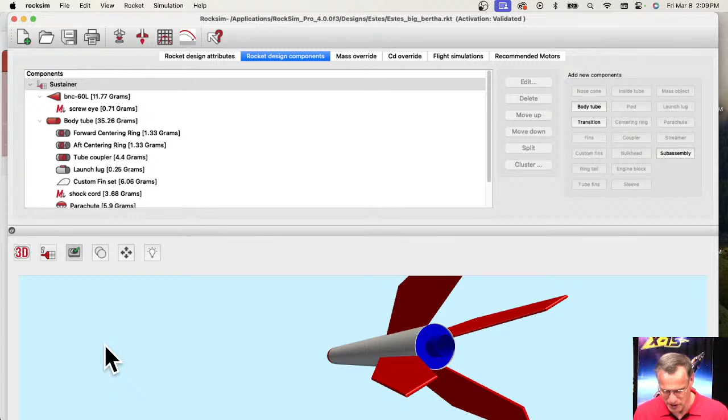So here's what the Big Bertha looks like in RockSim. And obviously the colors need to be changed on this, because having a blue base is kind of weird.

So to run a simple simulation—this might be a question a lot of people have—how do you pick a rocket motor for your rocket? I had somebody come into our store this week with a rocket, and they said, what motors can I use for this? I said, well, first you find the design, like the Big Bertha, and then it's really simple.

Then you just go to Prepare for Launch, which is this button right up here that looks like the base of the rocket with 2 arrows pointing downwards to the blast deflector. So that's Prepare for Launch, and you click on that. Then you just click on Recommend the Motors.

It's going to ask you how long is your launch rod, and what motor manufacturers you want to look at. So I could say, let's just look at the Estes ones. Then use the recommended conditions, click on that, and it's going to run.

And it found 6 motors, all Estes, and it tells me... so this column right here is called RockSim Recommended. 2 of the motors it does not recommend, and 4 of the motors it does recommend. And then here are the motors.

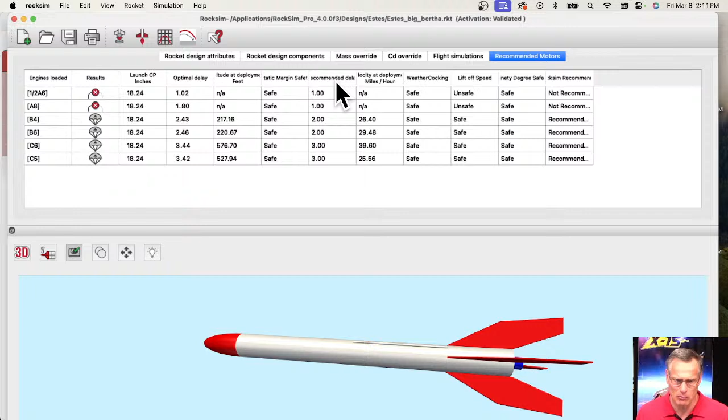And then I'd like to have altitude. Where's my altitude? If you can't find it, you can just click on the column bar up here and do organize columns. So I did a right click with my mouse, organize columns, and you can say altitude at deployment, I want maximum altitude, so make sure maximum altitude is checked, and it added that column over here. I can turn off some of these things I don't need.

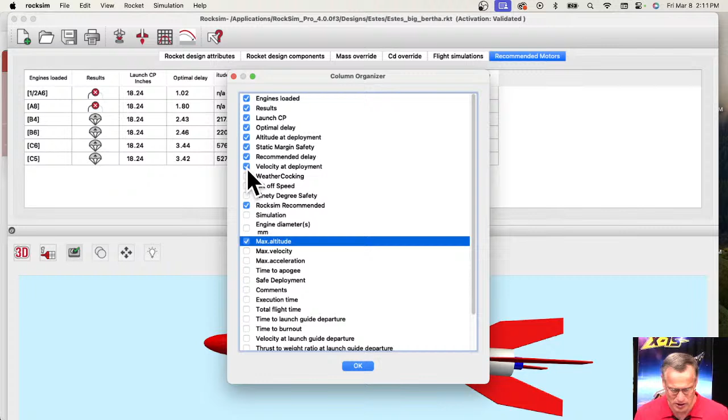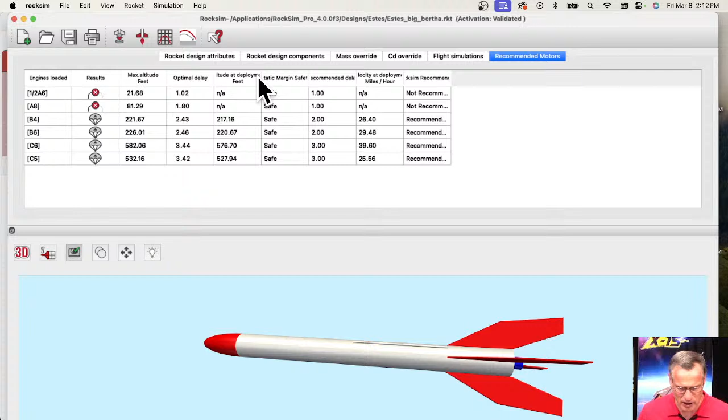Okay, those are good columns. So the results, maximum altitude, I'm going to slide over to here. Oops, one more over—this is the CP at launch, I don't really need that, so I'm going to take that one out. Launch CP, turn that off. Optimal delay, it's always good to know. Altitude at deployment, the recommended delay.

Okay, so it recommends this motor right here, C6-3, so that would be your recommended delay. We get a velocity at deployment, and it tells me that RockSim recommended that motor. So it's how easy it is to find a list of recommended motors—just click on that recommend button, and it will find you all the motors that would work in this rocket. Pretty simple, I like it.

So that's if you're launching your first simulation. All these simulations ran, and if I want to get more detail, I can rerun the simulation. I'll select it, right click, and do load engines, because it hasn't really loaded the engines yet. So it loaded the engine, and if I spin this around, I should see the engine in the back.

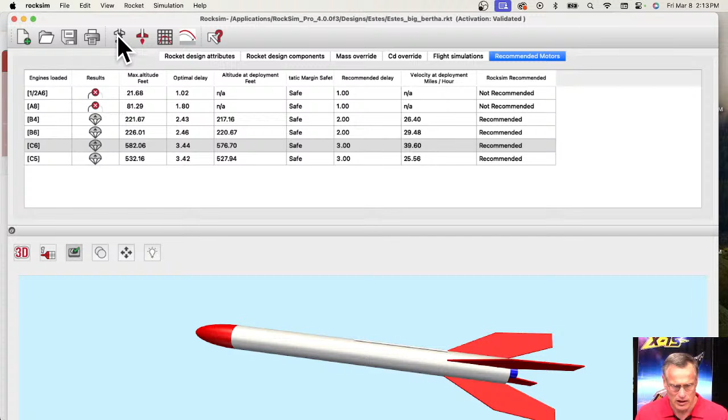Alright, so then I'm going to go back to prepare for launch. This is normally where you load the engine. We have the C6-3 under flight events. We're going to deploy at max ejection delay. Some of my columns are a little short here. We have the device and the parachute under simulation controls.

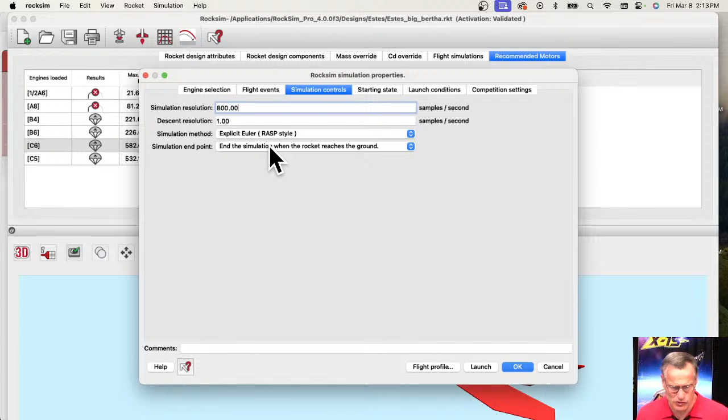That looks good. Starting state, we're actually launching straight up at a 0-degree launch angle. This is kind of like the direction of the launch angle, and this is a wheel, so it will control the launch angle like this. But I want to launch straight up.

Launch conditions, I'm launching at an altitude of 700 feet, which is kind of like eastern Iowa. Got a temperature of 59 degrees, which is a little warmer than it is outside right now. And I have a custom wind of 8 miles an hour, and this is a constant wind because I have low and high wind speed set to 8 miles an hour. And then I can hit the flight profile, and it's going to rerun the simulation again.

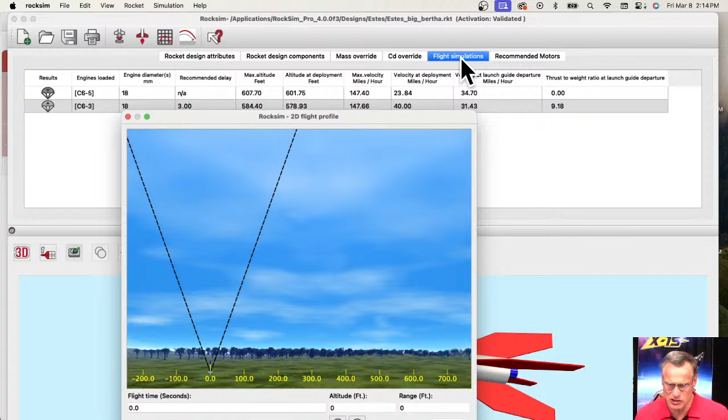And this time, before we were at recommended motors, now we're at the flight simulations tab, and that's what we're seeing in this column here. So here's the C6-3, and it's an 18 millimeter diameter motor. They recommended a 3-second delay, and it's going to hit about 584 feet.

And then this screen right here is kind of a two-dimensional image of the rocket. So here's the rocket sitting down here at the pad. This V shape right here, we call that the weathercocking cone. We want to see the rocket stay inside of this cone until it hits, or at least for the apogee point. So the highest point should be between these two lines.

So we click the launch button. We can see the rocket's taking off, and we're still in the lines, and there's our apogee point. So this would be a good launch. Right now we're at an altitude of 460 feet, and it's still drifting downwards, and it should come back down to the ground about 413 feet downrange. So that's a pretty good launch, I would consider that one acceptable. So that gives you more detailed information on that particular launch.

Okay, let me see if there's any questions.

Okay, so Mark Sell is trying to decide 3 versus 6.

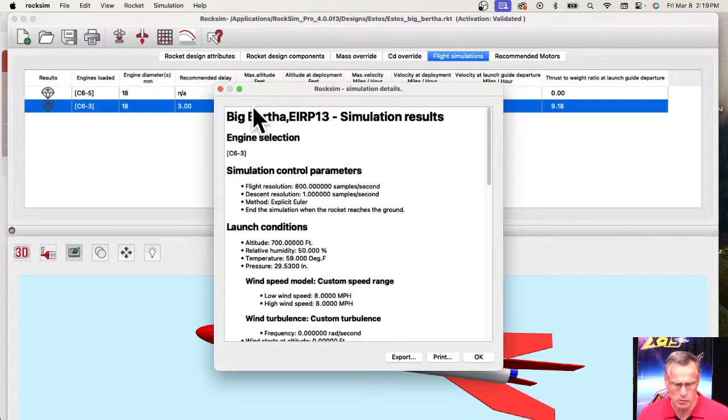The other way, like he said, is you can double click on this row and it's going to bring up a detailed report. This is what the detailed report looks like, for that particular flight. If you scroll down to the bottom, you'll get landing data. So here is the landing data, and here is the range at landing.

Yeah, that's a good idea, having range in these columns. So that's the second way you can find it.

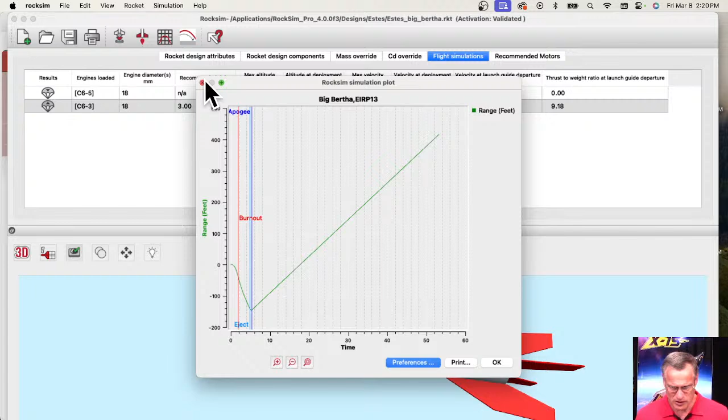And the third way, if you're really interested, is to plot the graph. We can plot along the x-axis time, and on the y-axis range, then clear out these rows and click plot graph, and here is the graph. Let me make this bigger.

Okay, so here's the range. It starts at 0 where my thumb is, then it goes negative, then positive. Why is it going negative? That's because we had wind blowing this way, and the rocket arced into the wind, so it went negative range until apogee, and then it started coming down this way because the wind was blowing it while the parachute was out.

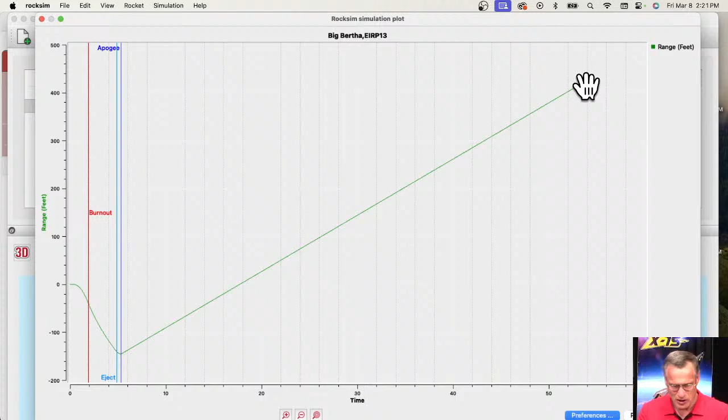So it started going positive around 12, 14, 18 seconds into the flight. It crossed over, took about 18 seconds to drift back over the launch pad, and then it drifted another 30, 40 seconds further, down to 417 feet. So that's the third way to get it.

So the data is there, it's just not in the place that you want it. That's a really good question, I like that one.

Ron Soto, okay, and he says he's from Florence, South Carolina.

He says, for a crumple on the body tube at the top of the fins, should I sand the crumple, sand the body tube, and use 4-ounce fiberglass and epoxy about 3/4 of an inch on each side of the damage? And then he asks, so a 1/5 inch wide piece of fiberglass?

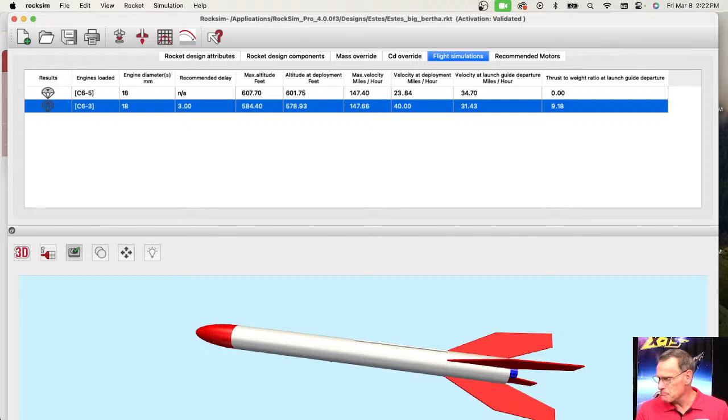Yeah, that's how I do it too. This is not RockSim related, this is just a good rocketry question.

So if you go to the Apogee website, go to How-To and Guides, go down to Advanced Construction Videos, and then come over here to All Videos. So here's all the videos we've done, and there's a video here on repairing a body tube. So I'm going to do a Command F on the Mac, Control F on Windows, and it brings up a search bar that searches only this page.

And what I'm looking for is repair. Okay, so it's used 26 times. How to repair a fin. Okay, kinked tube, so this is the one I was looking for.

So video number 363. If you just scroll down to video 363 from August 8th, this is the technique that I use to repair it, and it's fiberglass. Just basically wrapping fiberglass around the tube, kind of like putting a cast on a broken leg. It's almost exactly like putting a cast on a broken leg, although you can make it nicer looking. So yes, Ron, go for that.

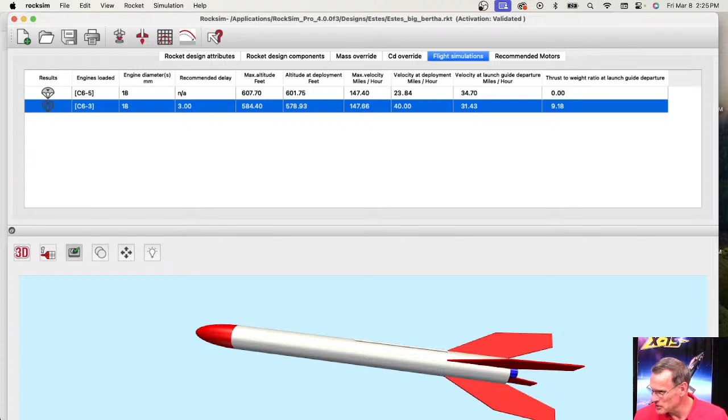Ron Soto says should be 1.5. I think he's talking about his fiberglass. How wide it is, maybe. Yeah, so basically he's got a kink in his tube somewhere like right here. And he's going to put a fiberglass strip around it, just wrap it around completely to strengthen that tube. It'll be stronger than the original tube. Fiberglass is much stronger.

Okay, so let's go back up to Mark Sell's question. So he's got a 3-fin rocket and he wants to change it to a 6-fin. So let's take this rocket here. Right now it's a 4-fin rocket, and so you can see the 4 fins there. And let's turn it to a 3-fin. So how do you do that?

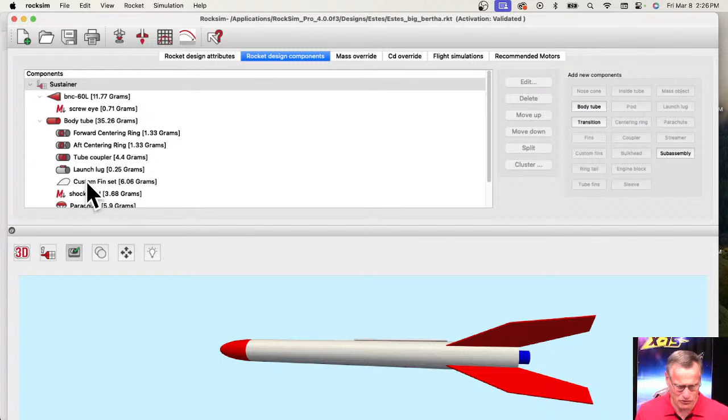Go here to the rocket design components. And then we're going to come down here to the fins. I'm going to edit the fins. So I just double clicked here. And I'm going to make the screen a little smaller so you can see it. There it is.

And right now it's showing 4 fins, and I can change that to 3 fins. And we've got a huge static margin here, 2.75 inches, or a static margin of 2.75, which means that this center of gravity is 2.75 times the diameter of the tube in front of the center of pressure, which is that red dot right there. We only need to be about 1, so the static margin only needs to be about 1.0. That's kind of like the rule of thumb in rocketry.

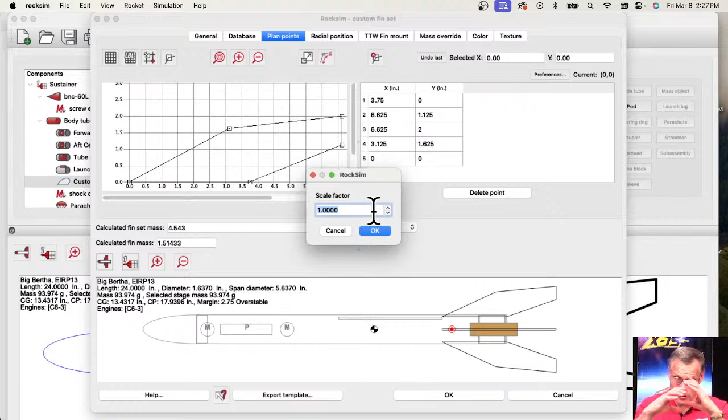And one of the ways that you can change that is by adjusting the size of the fins. So I'm going to go here to plan points, and I'm going to hit the scale button. And I'm going to scale these down, so I'm going to make them smaller than the current fin. So let's try 75%. Click OK. You can see now the fins are smaller, but they also shifted forward.

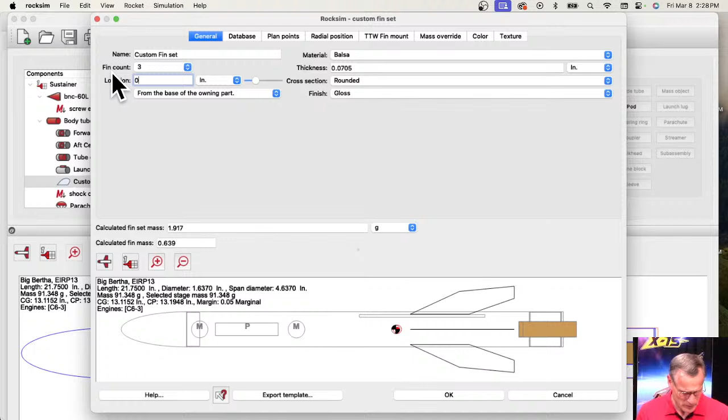So I need to go to the General tab, and I need to change the location to the base of the owning part. And now we're measuring from the bottom of the tube to where the bottom of the fin starts. And right now it's at 4.5, and I'm going to change that to 0. Hit tab, and so now we're over here. We got 3 fins, and we still have this huge margin. But before it was 2.75, now we're down to 2.2.

So theoretically, we can make these fins smaller. I want to make this 3 fins. Just saying, why am I, there we go. So why am I seeing 1 fin straight up and down? Okay, I can make this fin smaller.

Let's do that. I'm going to go to the plan points, and here's the shape of the fin. So I'm going to take this fin point right there, and move it forward. So I'm changing the shape of the rocket a little bit. It's not that critical, you can see I'm making it stubbier. My margin is now 1.6 instead of 2.2. So I'm getting there.

I'm going to move that point right there. Okay, so now we're at marginal 0.8, so I made it a little bit too small. So let's make this fin just a little bit bigger. Getting closer. Okay, so that's like really close, we'll call it good enough. So there's my fin. And we're going to click OK.

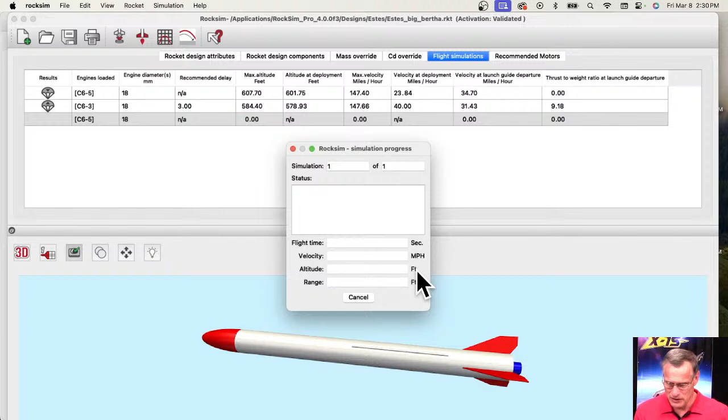Still running. Okay, let me see if I can scale the image. Okay, so that's better, I got more ground right now.

Okay, so here's the rocket sitting on the pad, and let's launch it and see what happens. It's going up, still going okay. It's still inside the cone, so we're fine. There, it looked like it ejected just a little bit early.

And then it's coming down, and this time it's drifting further. Why did it drift further? Well, that's a good question. Let's see if we can figure that out.

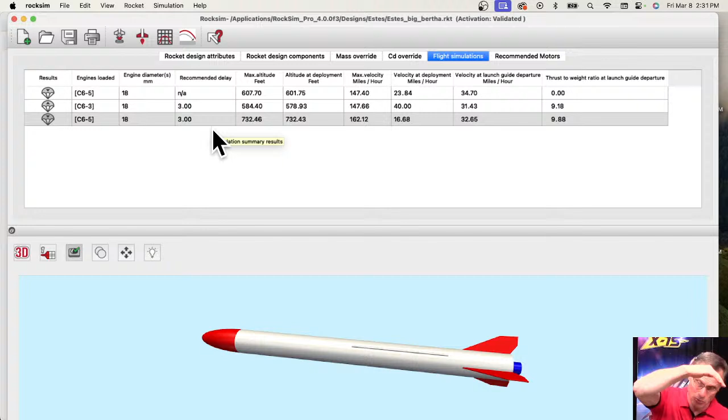So I'm going to cancel there. So this first one had the big fins, and with the big fins it went 584 feet. With the smaller fins, because there's less drag, so there's also 3 fins instead of 6, our maximum altitude is 732 feet, and it tells me that it did eject on the way down. So it did reach the top, and it was starting to come over the top when it popped the parachute, and it was just really close. So I'm going to leave that alone.

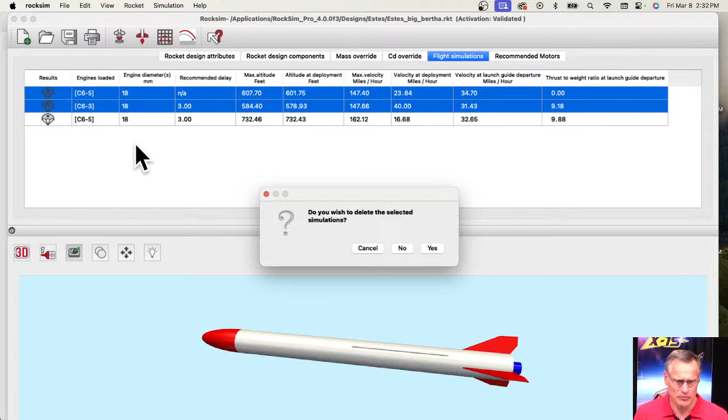So that is our first simulation. I'm going to delete these other 2s just so that we don't get confused. So I'm going to highlight them, do a right click, and hit delete. And it's going to ask me if I want to delete them. I'm going to say yes. Okay, so this is the only simulation with 3 fins and a static margin of about

1.12. And so now it's like, is 3 fins better than 6 fins? So let's see what happens when we change it to 6 fins. So we're going to go back to the rocket design components, go to the fin set, open that up.

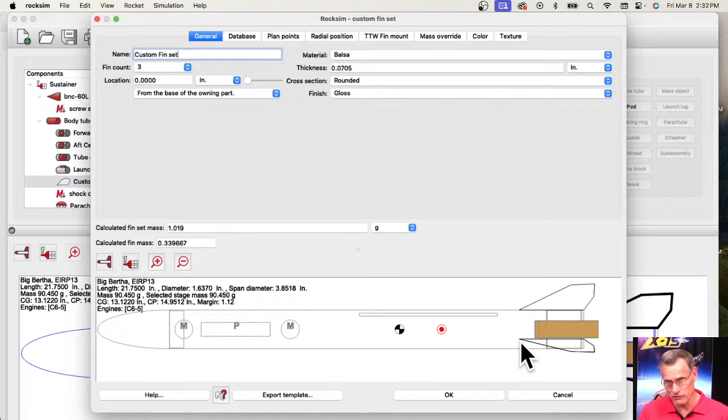So to make this apples to apples, I got to have 6 fins that give me probably the same static margin. So my static margin is 1.12. So if I change it from 3 to 6, my static margin goes back up to 2.21.

Just for grins, let's launch it with 6 fins, 6 fins of the equal size. And let's go to prepare for launch.

And what I want to do is put a comment on this one here. So this is going to be 6 fins that are the same size as the original 3 fins. I just want to have that comment there so I can tell these simulations apart later.

So then I'm going to do a flight profile. Let's take a look at it. It's going to run the simulation.

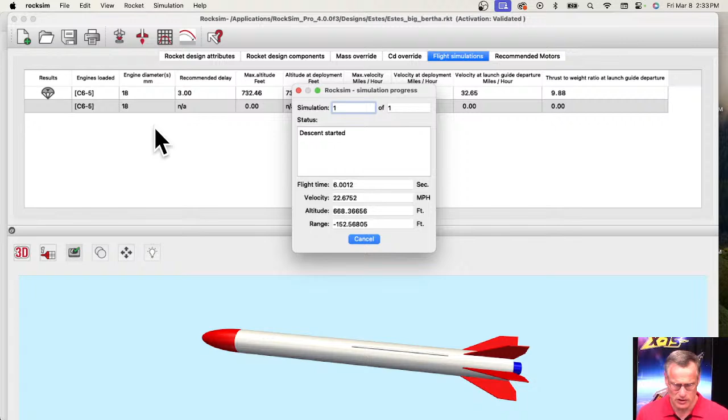And this time, I'm kind of cheating here, I'm looking at the simulation. It's a lower altitude. Why is it a lower altitude? Well, we went from 3 fins to 6 fins, and 2 things changed.

One is the drag is greater because instead of 3 fins, we got 6 fins, so we're going to have more drag. And the other thing that changed is the weight of the rocket, because the size of the fins didn't change, but now we doubled the number. So you got to say if 1 fin weighed 2 grams, then 3 fins is going to weigh 6 grams and 6 fins 12 grams. So 2 things happened, and that's why our altitude went down.

And again, the arrow direction on the parachute tells me the direction the rocket was going when the parachute opened. And since the arrow is pointing down, the rocket was coming down when the parachute opened.

Okay, and then if you want to see that comment, let me run the simulation here real quick. It's going to look fairly close to the last one. Okay, so then it popped out, and then it comes down.

And it's closer to the pad than the 3 fin was, but it didn't go as high, so you don't expect it to drift as far either, right?

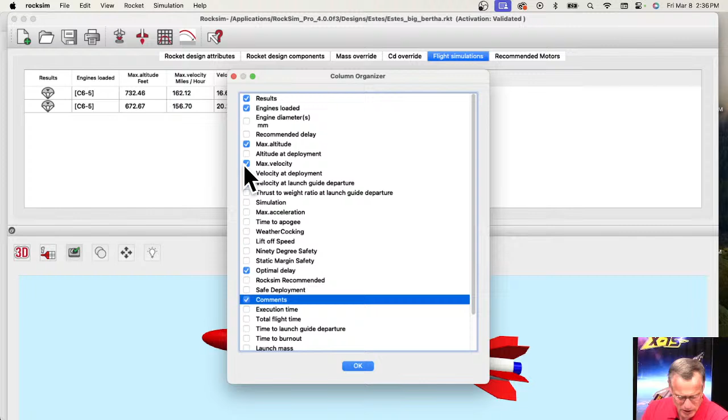Okay, so here's my comments. And if I can expand this column out. So this is the 6 fins that are the same size. This was the original 3 fins. I can't go back, unfortunately, to add a comment later. I wish I could.

Okay, I think, let's see, is there an organized columns? I'm looking for mass at liftoff. If we had here, launch mass. Okay, I'm gonna move that one over here. Let's move the optimal delay over to here and expand our comments out. So at liftoff, the 3 fins did weigh less. It wasn't much.

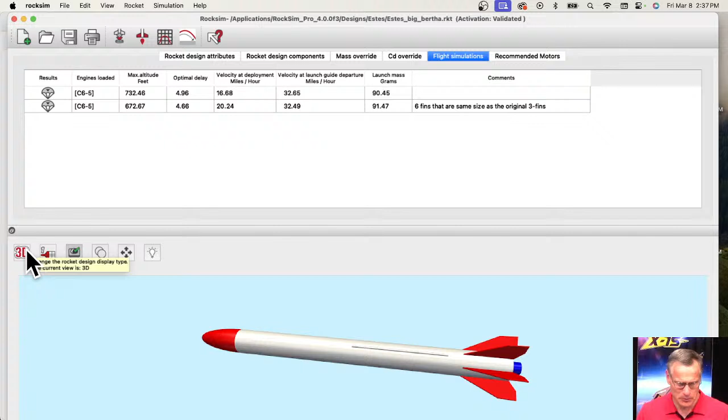Okay, it should be a little bit more than that. I don't know what happened. Okay, so now let's change these fins to be smaller so that the static margin - you can see the static margin in the 2D display right here - and we want to get that to 1.12 or pretty close. So basically we're going to move the center of gravity back towards here, or the center of pressure forward, to get it closer to the center of gravity, so they're closer together.

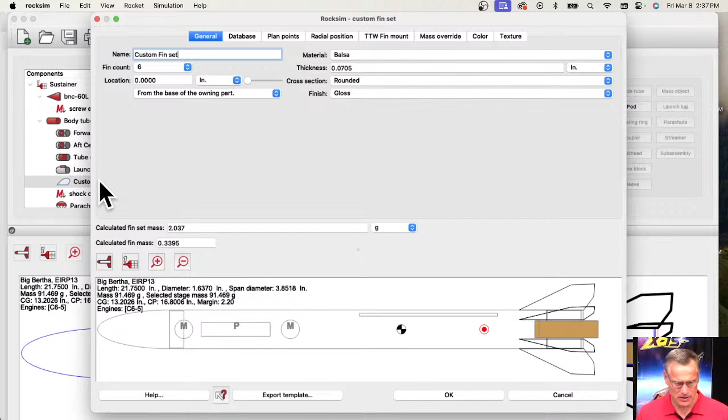And there's a number of ways to do this. Let's make the fin smaller. So go to the rocket design components, go to the custom fins, and we're going to go to the plan points, and we're going to adjust the size again. So here's the size originally, and remember, we're looking at this number right here. We want to get it to about 1.12.

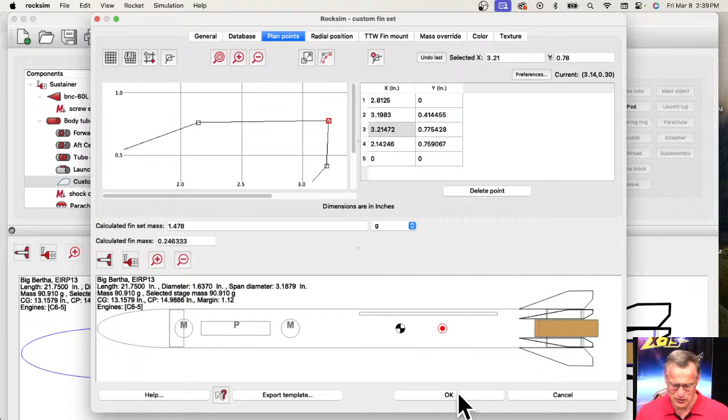I can zoom in and move it. There we go, I got it perfect. Okay, so the fins change size, and click OK. So now the distance between the center of gravity, which is this, and the center of pressure, which is this, is 1.12 times the diameter of the tube, which is what we had for that first simulation that we ran. And why did it move my column?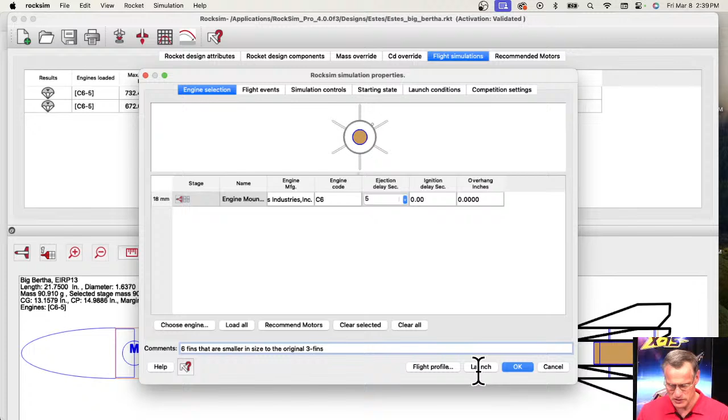Okay, so we're going to run the simulation again. With 6 fins that are smaller in size, compared to the original 3 fins. So let's go to flight profile and launch it. And we can kind of cheat again by looking at the summary screen. So this did not go as high as that.

And our weight is really close. So let's just look at it, see if it's going to go outside of the cone. Remember, this is a cone. And nope, we're inside the cone. We're always looking at the apogee point inside the cone. That's really all that matters. It can do whatever, as long as it's inside the cone, I'm okay with the flight.

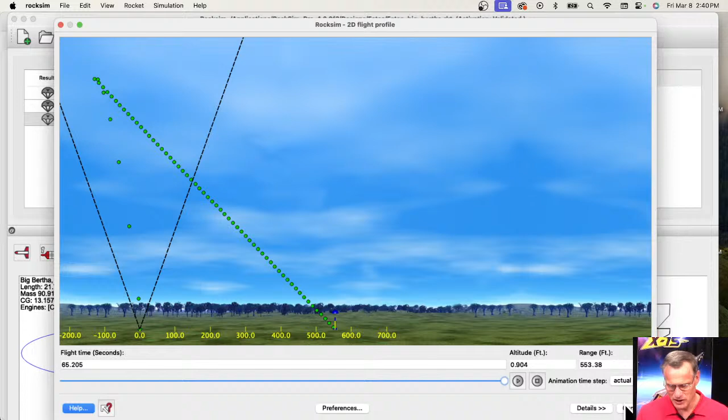Although if it went way off, I'd probably say, no, not quite stable. Okay, so this rocket's going to come down and land about 553 feet downrange, and click cancel. So we're comparing this one versus this one. And so the 3-fin one went higher than the 6-fin one. And both the weights are pretty close.

They're less than 0.5 gram apart, which tells me the difference between the 3-fin and 6-fin is probably just the drag. Just the drag of the fins alone is going to make the rocket fly not quite as high. It's close, but not the same. We're comparing 732 feet versus 696 feet.

So which one is better? Define better. If better means which one went higher, then the 3-fin. If better means which one flew straighter, we didn't really look at the trajectory, but you could probably look at that and see which one looked like it was going straighter. It's typically likely that the 6-fin will go straighter.

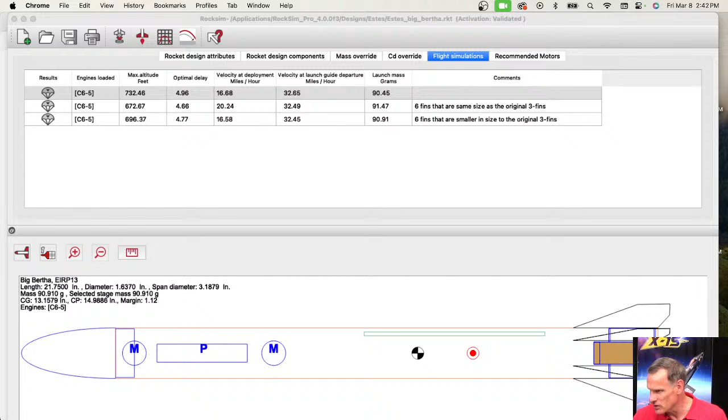Super Neon XL. Okay, so let's go to the internet and see if we can find a Super Neon XL. I'm going to do a search bar and a Super Neon Rocket Kit RockSim file. Let's see if Bing can find him. So we have a Super Neon RockSim design file from rocketreviews.com. Let's go there.

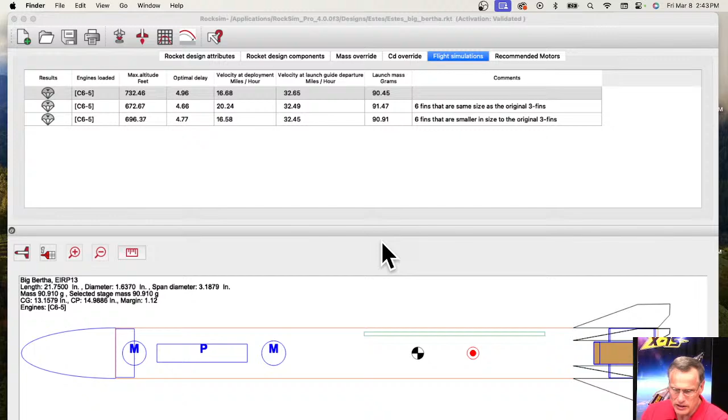Okay, it says download the Estes Super Neon. I'm going to click download and it put it into my downloads folder. So I'm just going to kind of hide that for right now. Go to my downloads folder, open my downloads, and here it is. So here's the Estes Super Neon, and I'm going to open it. And to open it, I just drag it onto RockSim.

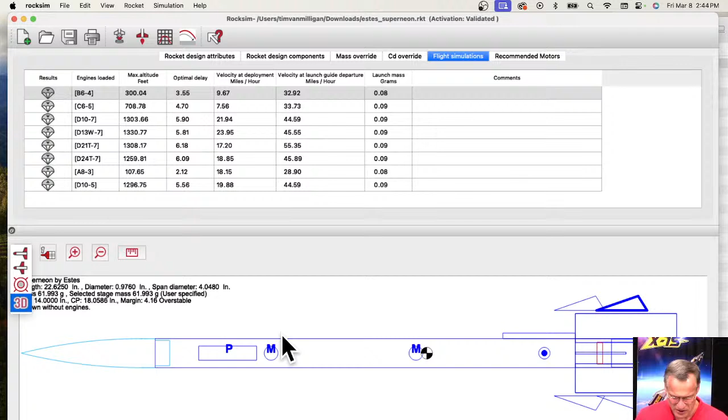And it says, do I want to save the changes to this old design? And I'm going to say no. Okay, so here is a weird design that somebody created. And let's look at it in 3D, see if it looks any better or worse. Okay, so we got some fins, and they're not quite attached to the tubes.

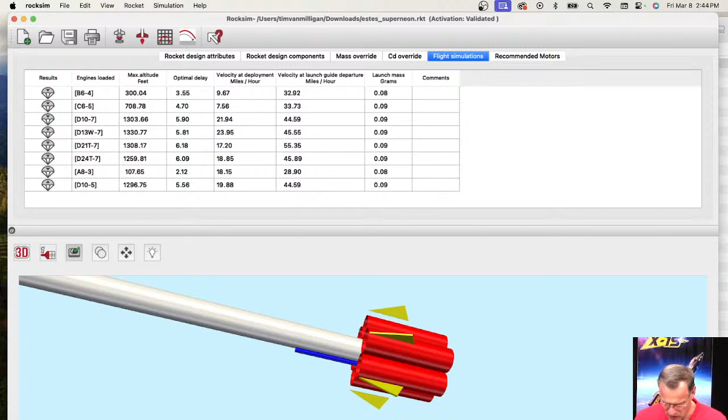Let me see. I do not know particularly what the Super Neon looks like. It said it didn't find anything for that. It's just Super Neon.

Let's do a Super Neon Rocket Kit image. Look at this. What does Bing call this thing? They're... I forget what they call it, but man, it's already finding things about it. What I'm looking for is an image. And let's hit the return key and see what comes back as an image.

So we would have to correct our file first. Go to the rocket design components, click on that. And it's got these fins here. And we have a pod. We have 1, 2, 3, 4, 5, 6 pods attached to the fins.

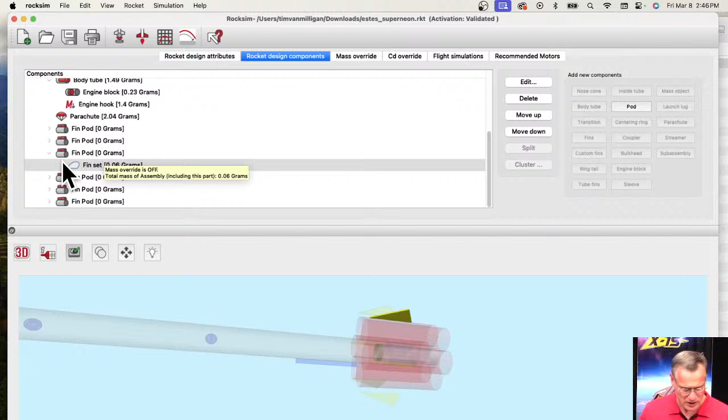Interesting. And each of these pods has a fin, and the fin weighs 0.06 grams. That's kind of like really lightweight. Let's delete these because we're going to have to correct this. So I'm going to select them one at a time and hit delete. Say yes, delete it.

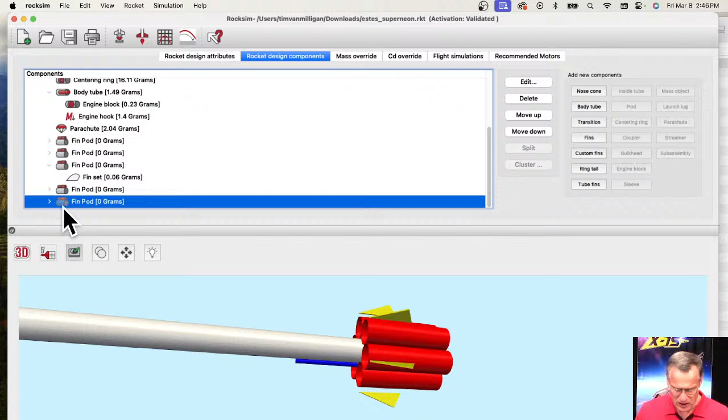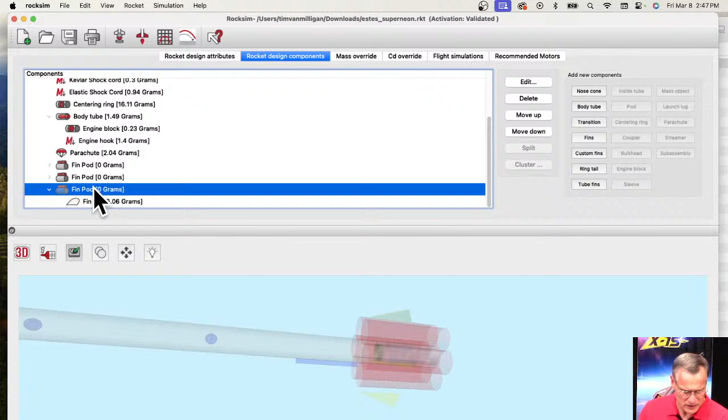And this is going to take forever because my computer's running slow when I'm streaming. Delete. Yes. Delete this one. Yes. Delete that one. Say yes. Okay, so now we're down to one fin right there, if you can see that.

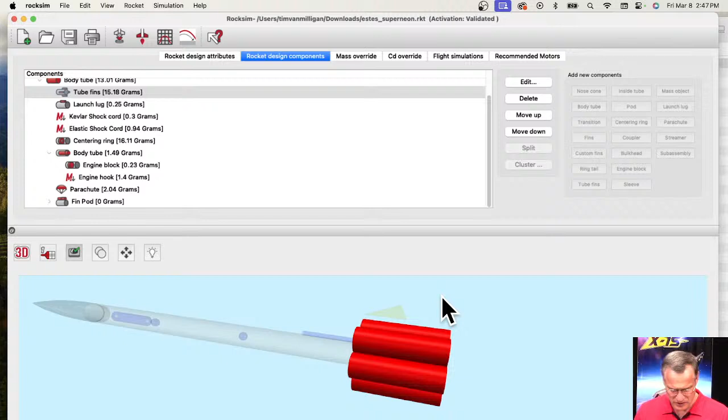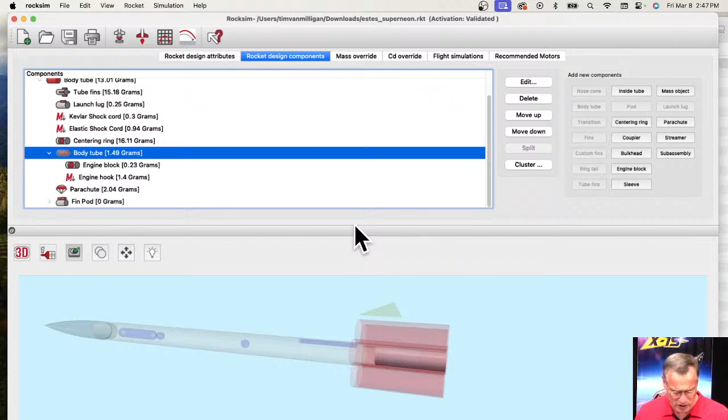So we need to make that look kind of like the other one. So basically, the rocket, just kind of looking at it otherwise, we have a nose cone, a body tube, and then we have these tube fins, which is the right way to do it. We have the launch lug, and then we have all the internal stuff, and then we have this body tube right there, which is the engine mount. I always like to change the name so that I know what I'm looking at. So I'm going to call this the engine mount. Click OK.

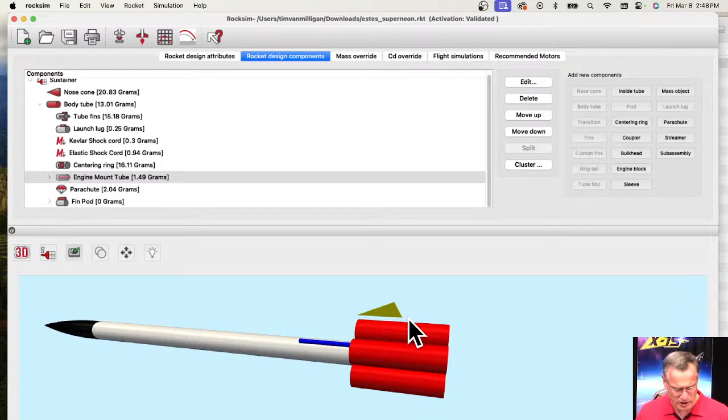Okay, and then we have a parachute and then the pod with the fin. So here's one pod. So a pod, and this goes to the other question that Two Explorers wrote. Was it you? Yes. Yes? No. Yes.

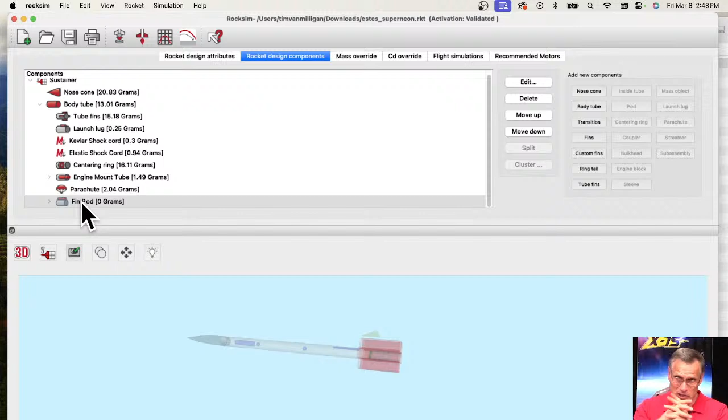Can you save a pod? So a pod is a collection of parts, but a pod that's different from a subassembly is a pod is on the outside of the rocket, subassembly is on the inside. But you can't save a pod by itself. So I'm going to try to open this pod, and I want to edit the pod. So the location of the pod is right there. Let me see where it is, if I look at it at the base view. Okay, so it's on the fin, or it's on the side of the tube. Right there. So that's a good spot for it. I'm okay with that. And what we're going to do is attach a fin to that pod.

So I'm just checking the pod here. It says the pod can be ejected, but no, we don't want to eject it, and we don't want to mark it as ejected. So that's fine. A pod doesn't have any weight because it's just a collection of parts.

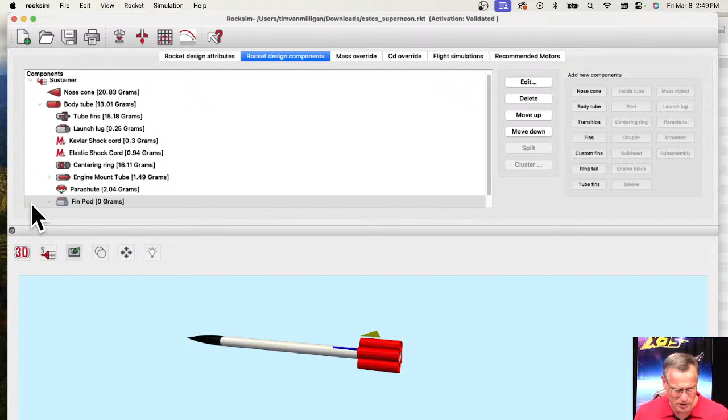We're going to add parts to it, and the part we're adding is a fin. This is a custom fin, and right now it's the shape of a triangle, so we're going to modify that by going to the plan points.

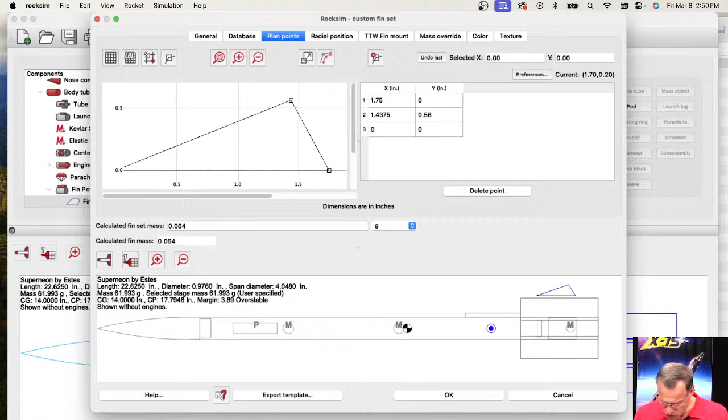Here's my pod, and I've got to look at my picture again. Okay, can I zoom this? Does that zoom in there? Yeah, I zoomed a little. Oops, what did I do? You found all kinds of rockets the same shape.

Okay, so it looks like it's got a short thing, probably about not quite 50% of the length of the tube, and then it extends outward. We're going to approximate it. We're not going to be perfect.

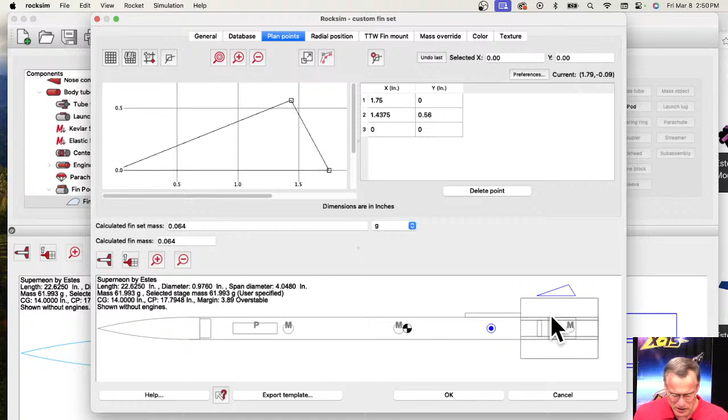So first, this fin location—why is this the front of the fin back here when it should be attached there? Is there anything that tells me fin count? It's made out of balsa wood.

Don't want anything from the database. This is interesting—why is this fin way back here when it should be up here? I don't know.

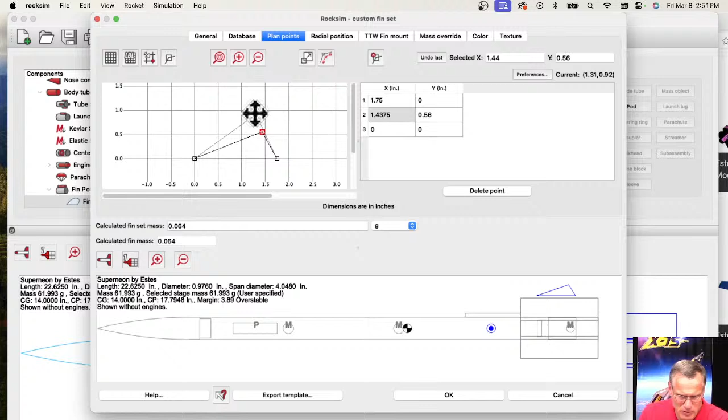Anyway, we're going to make this bigger. To make it bigger, I'm going to zoom out a little bit. Okay, I'm going to grab that point and move it here. I'm going to grab another point, move it there. I'm going to take this point and move it there.

Okay, so now it's a little small, and it moved it even further back. Why did it do that? Why, oh why? But we need to make it bigger.

I think the span is getting close to where we want, but— oops, I grabbed the wrong point. Undo the last. This point right here, I want to make this one kind of like there. I don't think it's quite long enough yet.

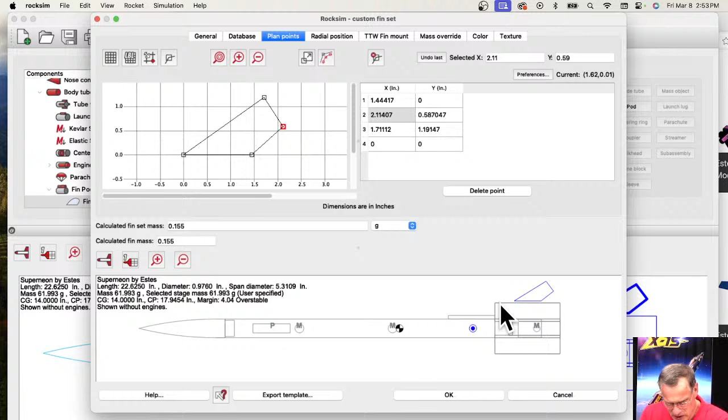I'm just kind of approximating the shape here. Okay, so now my problem is, why is it not in the right spot? That's interesting.

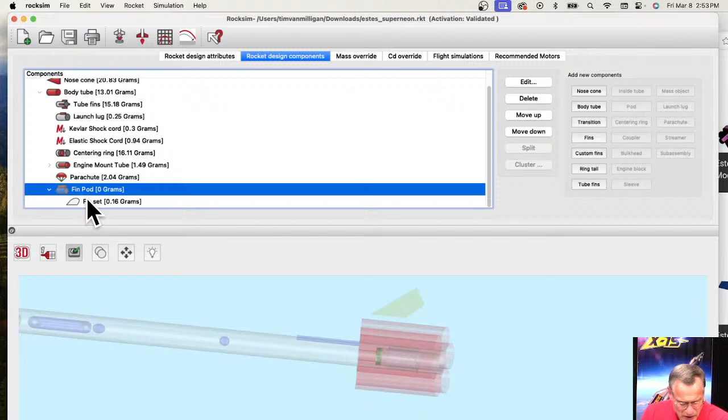Plan points—well, let's see if we can adjust it in the pod location. It's just kind of like too high. Okay, so we're going to take this and slide it forward. So why is it—this should have been right at the center of that.

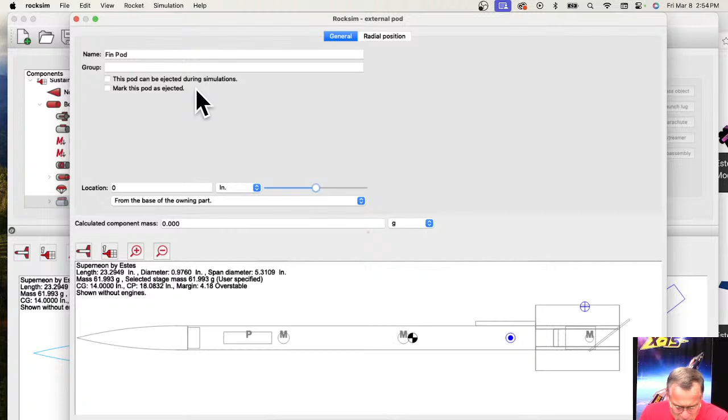Oh, maybe it's this—location 0 from the base. And it's interesting, where's that pod attached? This pod is attached to the body tube. Interesting.

So let's move it forward. Why am I looking at the side of it? This is weird. It kind of flipped things on me. That is weird.

Yeah, it's going to be close enough. Let's look at it from the top view. This is moving around on me. There's something going on—something going on with pods. This shouldn't be happening.

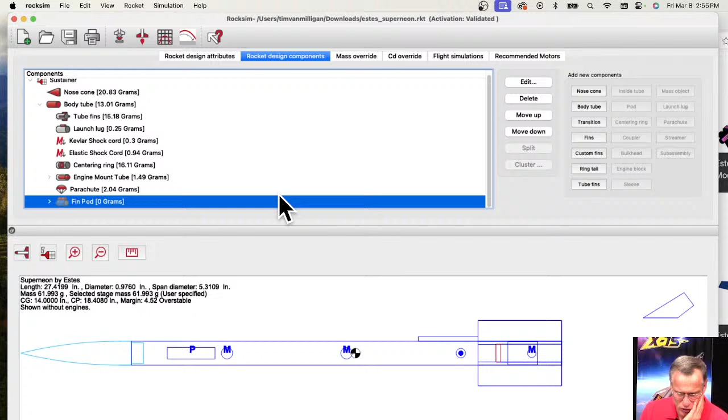It's something I'm going to have to ask the programmer about. Say, what's going on with my pods? I'm currently using RockSim version 11, so this is a version you don't have yet. I thought we were done with the bugs.

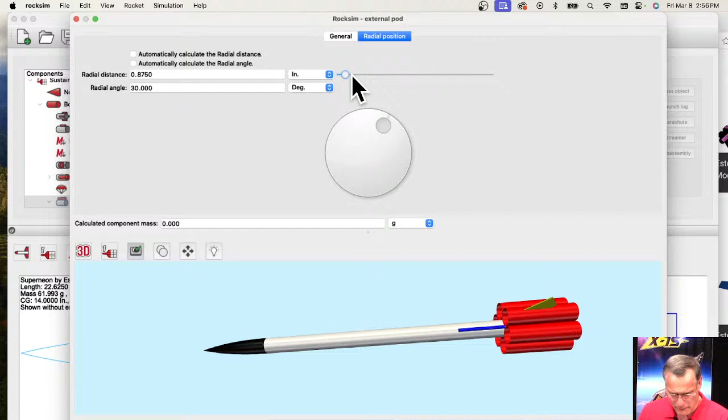But in the 3D, it's just too far up, and I can adjust that here. See, it's a little bit off the tube right now. So that's much better.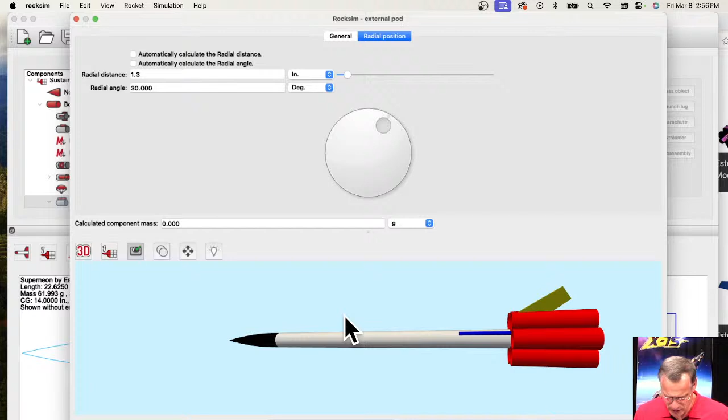Okay, and it's just too far back, but other than that—see, in 2D it just looks different. It looks further back.

Anyway, so now that you have a pod, we're going to duplicate this. I'm going to highlight it, right click on it, and say copy. And then we need to paste it onto that tube. Paste—ooh, look at that, it changed it.

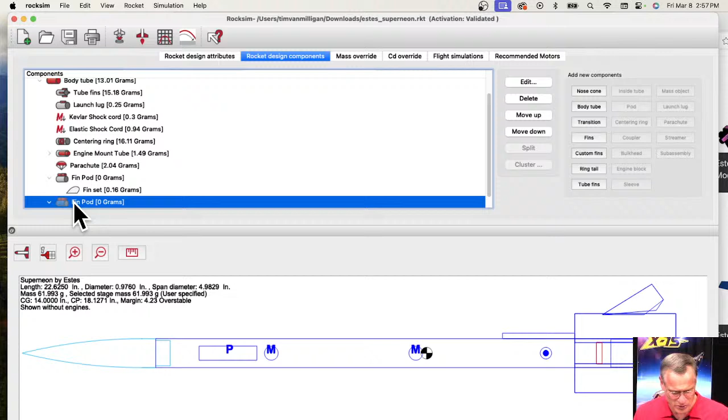What the heck? Okay, so then we're going to go open the pod. Man, it changed my shape. Radial position, let's make it 60 degrees. Let's look at it from the back.

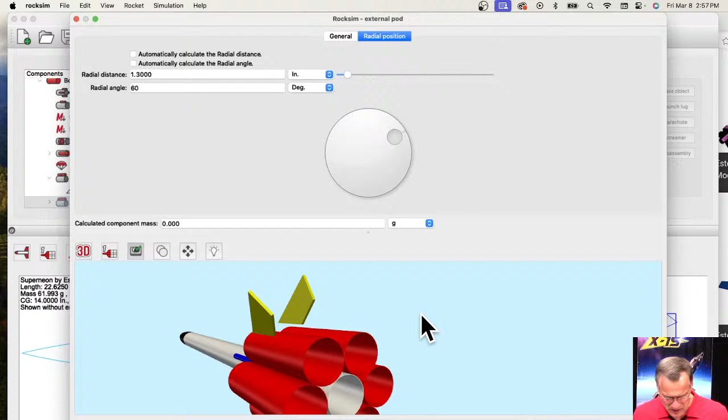Yeah, it's in the right spot. I think I needed to go... 60 degrees should have been it. It's not 120. 90. That's interesting. At 90 degrees, it's right.

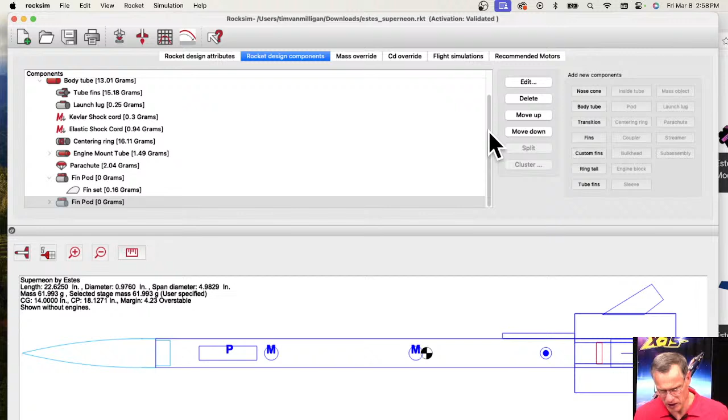And then you got to do it multiple times. But anyway, we're not going to have time for that because we're almost out of time here.

But then you would run a simulation. So again, choose prepare for launch. Choose engine. Let's go with an Estes. Manufacturer code Estes C6 5. Okay.

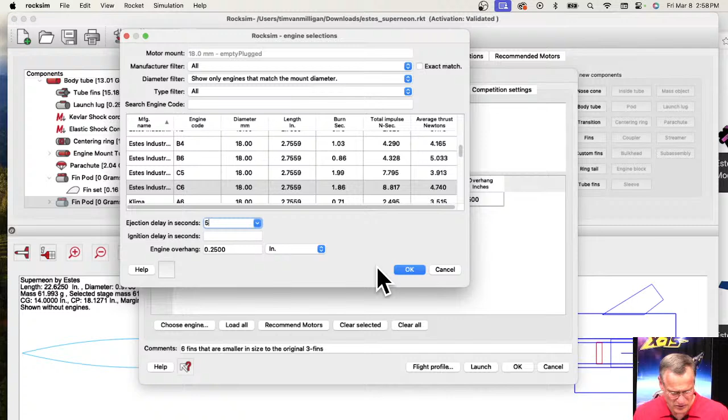Again, before we're ejecting at maximum ejection delay, simulation controls we leave alone. Starting state, it's launching straight up. And again, our conditions are 700 feet above sea level, 59 degrees Fahrenheit with a wind speed of 8 miles an hour. And hit flight profile, let's see if it goes.

And it went. Oops, it left my comment in there. I forgot to clear the comment. All right, and the rocket's taking off, and it's going up, and it's coming back down.

Okay, so it went 705 feet on the C6 5. And basically, I only had 2 external fins, but with the tube fins, the rocket was stable enough.

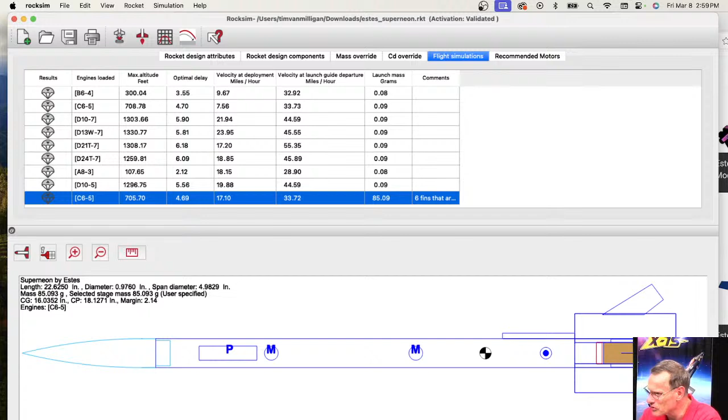So his question to Explorer - I found a RockSim file, but it does not have the balsa fin on the tubular fins. Doesn't seem to want to fly. If it doesn't seem to want to fly, do what I did and modify the design. Don't be afraid to modify it. You can always download it again and start over again. Don't be afraid to try things. Even if it doesn't work, like what you saw me do.

Mark Sell says, you've given me good ideas about how to do the 3 fins versus 6 fins. To Explorer says that file is different from mine, which might be the reason why yours is not working.

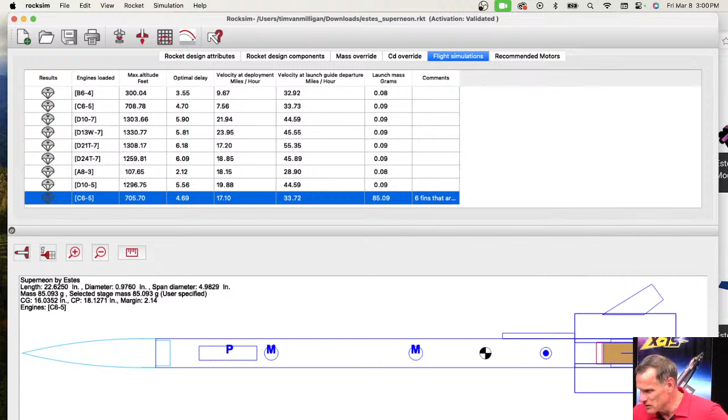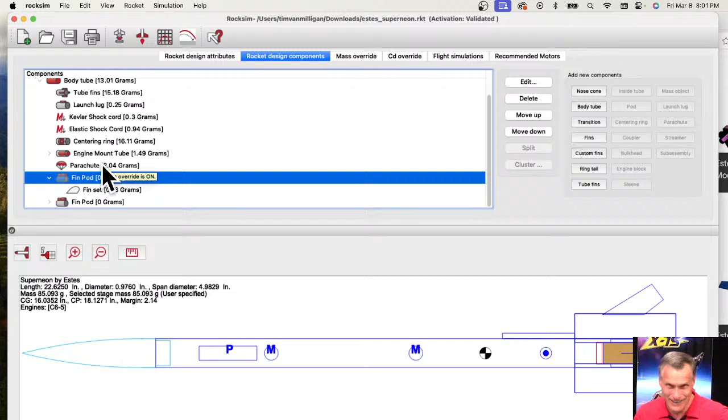Can a subassembly be attached to a pod? Let's see. That's something I've never thought about before. So here's a pod, and the subassembly button is not selectable. So no. That was easy to find out. You cannot attach a subassembly to a pod.

But you can attach a tube. So if I put a tube in there to a pod, body tube, right there. And I'll select this tube. So we added a tube. And now we select the tube and we can attach the subassembly to that tube. So you can do it. You can get a subassembly into a pod, but you can't attach it directly to a pod because there's an ownership rule there.

Johan says he's late again. Johan, show up on time. Although this week you're excused because I forgot to schedule it, so you probably didn't get a notification. He says he might have to design an airplane type soon. It inspires me. That's good.

If the pod is attached to the body tube rather than a tube fin, the radial would be accurate. This pod is attached to the body tube. So it's attached up here. If it was indented one level, see, we can't attach a pod because it's not lit up when we highlight the tube fins. So that tells me that this pod right here is attached to that body tube. And I'm not sure why it's not attaching correctly.

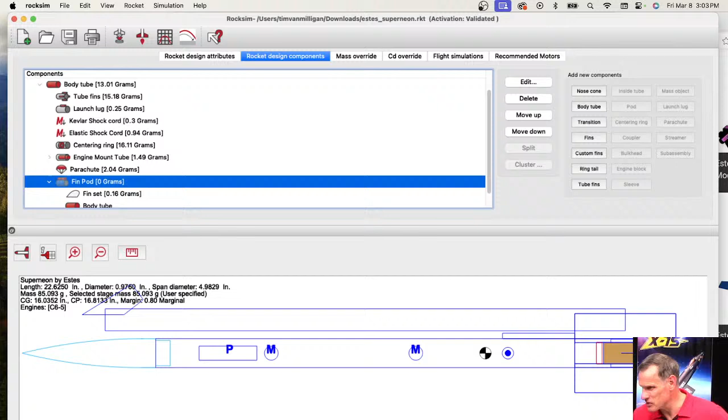Oh, Mark Sell is right. He says you started first at 30 degrees, so add 60 more and you get 90. He's smart. Mark Sell's smart. You better listen to him. Okay. And to Explorer says, great, better than I got.